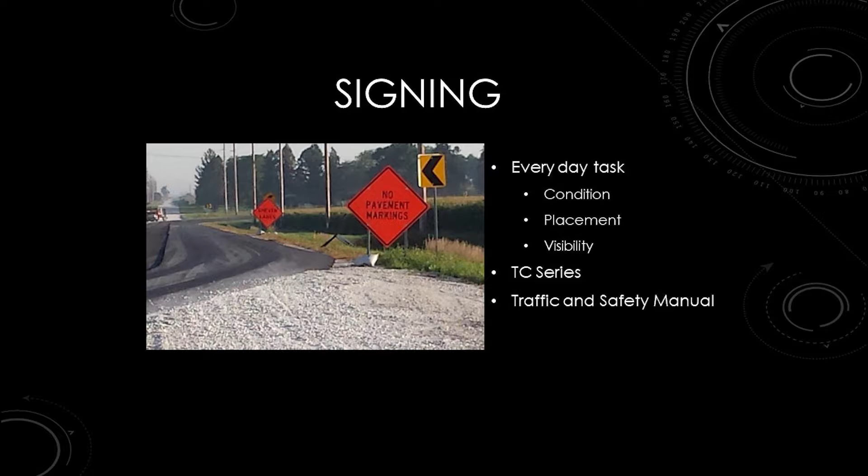This photo was actually taken immediately after the next two photos. I came across this one morning - we just got done cutting cores, I was taking them back to the plant, and there was a young man on his way to work, going too fast, probably on his cell phone. Luckily this was before we were set up. There wasn't anybody else on the road, and he was ultimately okay. He walked away with just cuts and bruises and a banged up truck.

I was very glad that the contractor had signs up and in good condition, because in today's litigious society you never know where there's going to be some liability. The deputy came out, wrote the accident report, noted that signs were in good place, and that was the end of it - we didn't hear any more about it. So it's always good to stay on top of that kind of stuff.

Lighting, that's something I don't think is referenced anywhere in the specs or the construction manual, but I think it's one of those little details that's really important. I was fortunate enough in 2015 to get a new truck, and I think the number one item on my list when I wrote the specs for it was just the biggest light bar wheel it'll make. I've always been impressed with Fort Dodge Asphalt - early in the morning, 5:30, 6 o'clock, they're out there getting equipment fired up, getting stuff fueled up for the day, and you can see their pickups from 4 or 5 miles away. The public traveling to work, maybe coming home from a late work shift, they can't help but notice that, and it just lets them know, hey, there's something going on here, I need to pay attention.

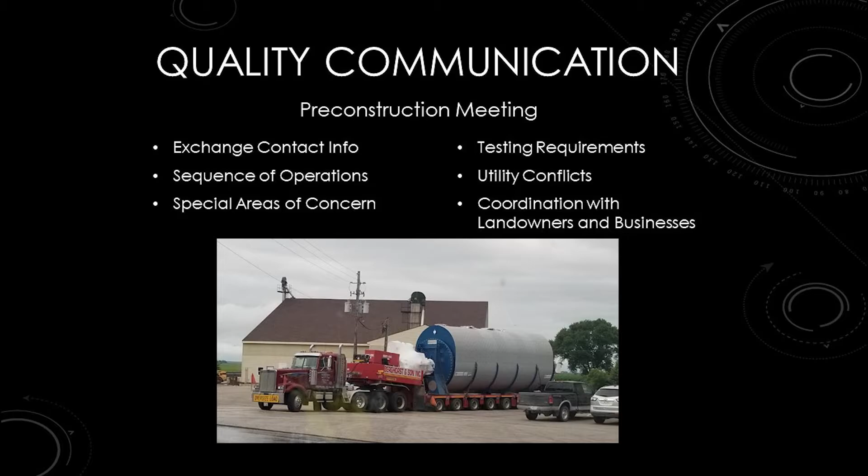You know, communication with the public. This was me having a little fun with my daughter. I took this picture and texted it to her and told her the sign was broken.

We're very fortunate in Webster County. We've got 2 changeable message boards. We utilize them a lot on paving projects, try and get them out there a week ahead of time, just let them know a project's coming. I think it does a lot to help get traffic diverted. Social media, that's something I think we could do a better job at, at least in Webster County. We don't really have that yet, but there's a lot of counties I follow in the DOT that really utilize that and do a good job, and even things like the 511 app. And of course, there's the old standby methods of press releases and mailers. Those things are all important, along with good communication with the contractor during the project.

Email, text messages, Doc Express - these are 3 things that just 12 years ago when I started, I didn't have at my fingertips on the grade, and now I do. Specifically, group text messages work very well for tracking. I always set up a group text with myself, the foreman, the superintendent, and the plant, and at the end of the day we put down what we have for quantities, and everybody sees it, everybody's seeing the same message. That way if I get 3-4 days down the road, and let's say I got busy at the end of the day and forgot to put a number in my books, I can just go back in my text messages. There's the quantities - I know it's already a quantity that everyone's agreed to, and I've got it right there.

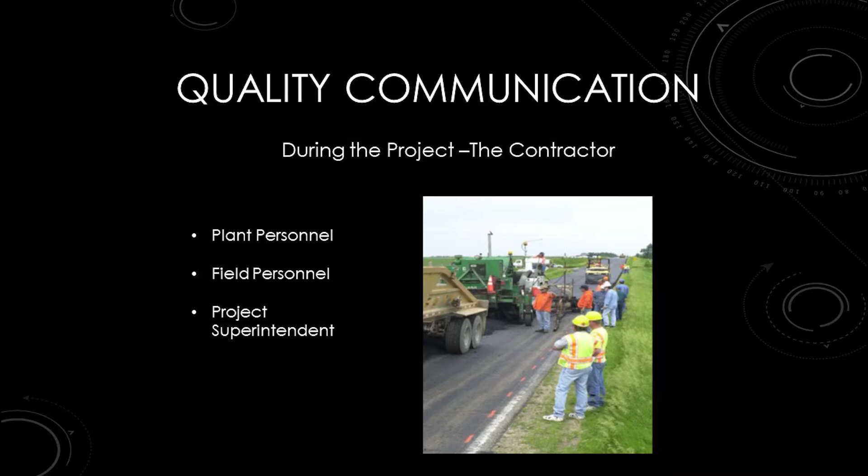Maybe the first thing out of the day, you're going to cut cores. Get with the CPI, ask them when they want to cut them. Normally, most contractors want to cut them first thing out. Get an idea with them - they'll have the core sheet, you'll have the core sheet. Most of the time, I've got my cores all laid out, so it does not take long - half hour, 45 minutes. They can buzz through and cut cores pretty quick if you've got everything done out ahead for them.

You may want to ask them to use a flagger because you're going to be out in the live lane while they're setting up traffic control for the next day and you're going to be cutting cores. Pretty good thing with them. Once the cores are cut, we take possession of them. I'll transport them back to their lab - that's where the monitor will be testing them.

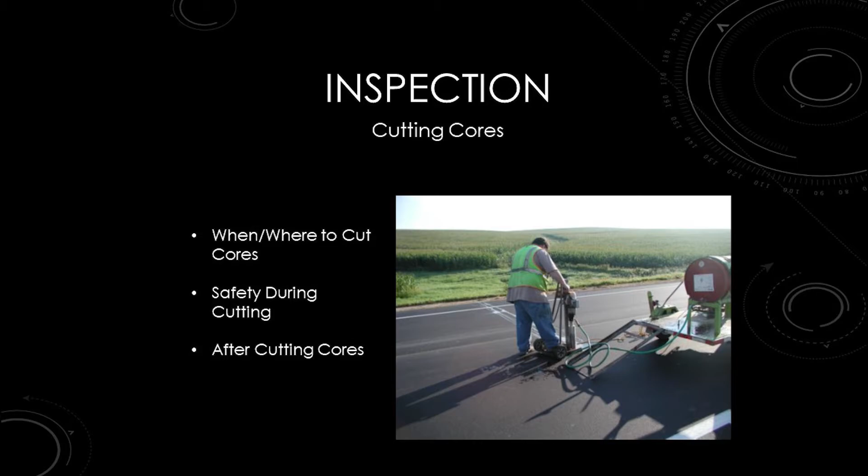The other thing was with traffic control - that's a major concern anymore with litigations. Check the signing, check the spacing, make sure it's out there. If something's not right, talk to your project manager, your road foreman. Road foremen are usually the ones putting that stuff out there. Like I said, if something doesn't look right, chances are it's not right, but just chat with them.

The other thing is the flaggers. You always want to agree with the flaggers with the road foreman. If you run through and count, check with him first thing in the day - he may have something different. Tell him how you're counting your flaggers. A lot of times they think they're getting paid for the flagger in the pilot car - they're not. So just square off right away, it'll be a lot easier on you in the end.

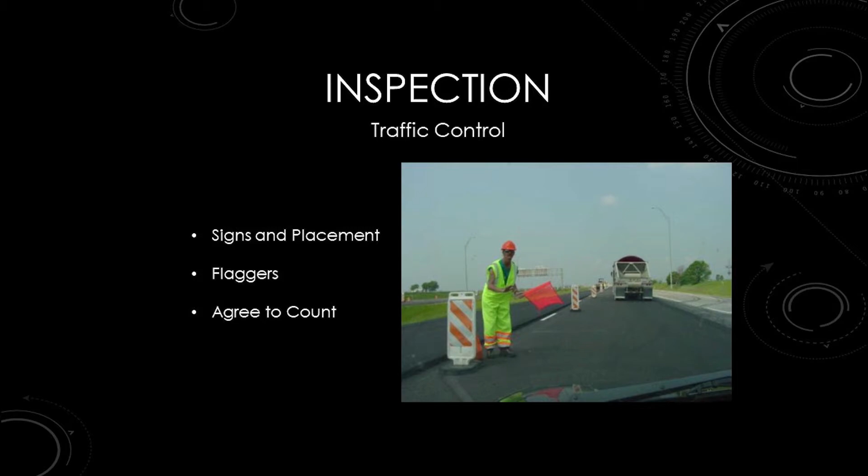Paving operations. You're always going to want to stating location. That's what you're going to deal with most of the day.

If you know where you're starting at, that's what you're going to run your yields with. You're going to go down through there. First thing out, you're going to get a mix temp. You're going to want to make sure that's above your limits.

It's always going to be crowding a little bit because most of your trucks are cold the first round out until they get warmed up. Don't get excited about it. Just let them know, hey, you're crowding the lower end to that temperature limit. Let's get a round in and they'll be warmed up after that.

Normally they are. You're going to be checking your width and your thickness on it. A lot of times when you're checking that, you're getting PWL on your 12-foot lane, but if they're pulling a shoulder with it, it's non-PWL. So just keep an eye on that there when they're coming out.

The roller pattern, that's establish your first time out. When they're going through and establishing a roller pattern, that's what they're setting their density off of. If that breakdown roller's making 3 passes, just keep an eye on him, making sure he's getting his 3 passes. A lot of times you can tell when you're not getting your density, keep an eye on it.

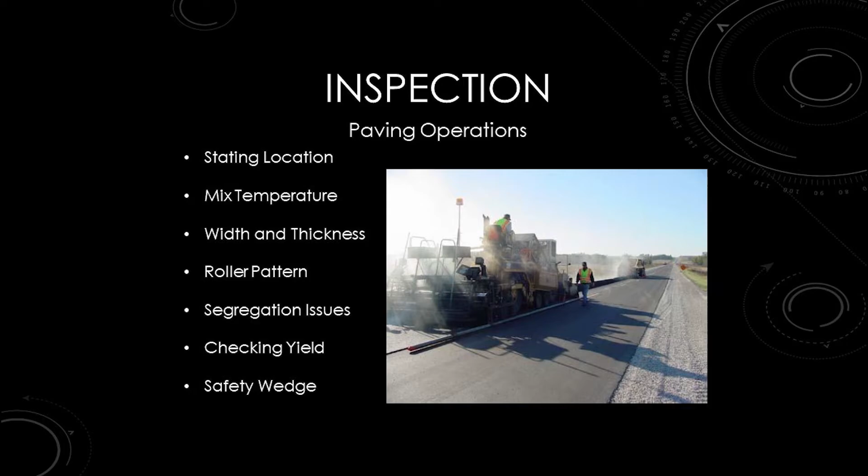On those hot box locations, normally when I turn into the plant monitor what we're running for tons for the day, he's going to make up the hot box locations. He'll be dealing with the CPI when they come out and grab them. They'll be getting all the information on them.

I know Jeff talked about doing it all by barcode. I'm still old school. We still throw in a paper copy too. Some of us don't like change very well. So I always throw the paper copy in there. Boxes still have all the information wrote on it, but you still got your barcode. It's whatever you're comfortable with.

Some of you CPIs, if there's something you don't quite like about it, talk to the inspector. They're more than willing to work with you.

Temperature of the mix on the road, like I said, we pull that every 2 hours. We're looking at that to make sure that mix is coming out hot enough.

Tack coat's another one. I know everybody first thing in the morning likes to spray the tack and lay mix, but we still need to make sure it breaks. We've had some areas where the contractor crowded it and it slid and moved. Normally during the summer months it does not take long for that to break, but when you start to crowd it in the fall and it's cool out, that tack's not going to break as fast. We still have to wait for that tack to break. That's just some of the things we're looking at. We may be sticklers on it, you don't like it, but we don't want that mat sliding on us.

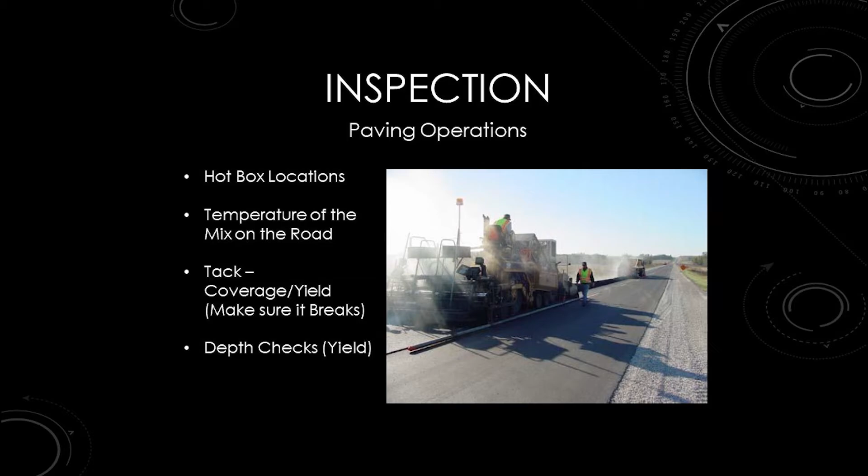At the plant, stay in contact with your CPI and your monitors. Those monitors are there to witness your cold feed samples, your binder samples. They're just witnessing what you're doing. You're loading the tins for them, but they're keeping an eye on the things. Like before I mentioned, I'm turning in the tonnage, what that road foreman said. We're looking at 2,500 ton today. He's the one setting the hot boxes up for them.

He'll be running the cores from the previous day. After I get done cutting them, I'll take them to him. He'll be testing the cores. Normally the CPI will do the trimming of them. If we get too far, he'll trim them off. They'll test them there at their lab.

The other thing is that monitor is going to be walking around your plants. He's mainly checking your bins to make sure you're not overloading them and intermingling. Checking your belts, it's just doing a walkthrough. I always tell the CPIs, your monitor will be out there. Do you have any safety concerns around there that he needs to be aware of? Every plant is different. The people at the plant know where a tight congested area is. Just let them know, hey, stay out of this area here. We don't want you in there. We can still visually see it from some other place.

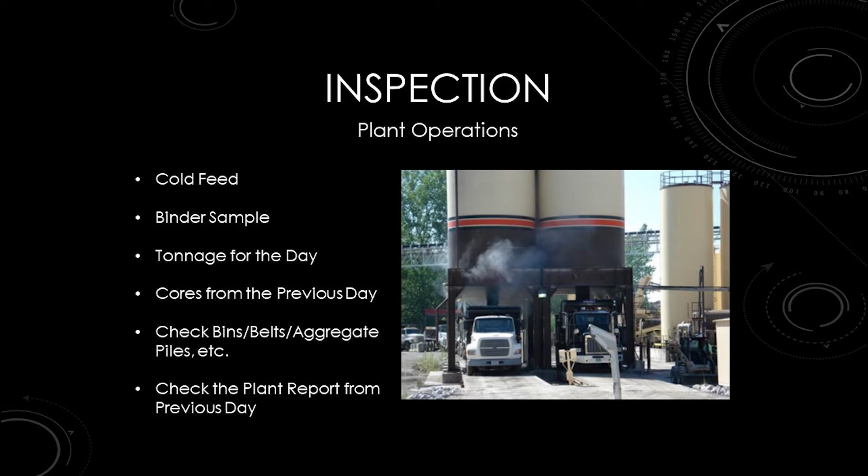Diesel fuel, we don't want it. I've heard every story from every trucker out there. It doesn't hurt a thing. If it doesn't hurt a thing, we do not want it. We will oversee that. If we see trucks that are getting out of line and going behind rock piles, we're going to go back and check and see what they're doing. Truckers do not like it when you pull them out of commission because they're spraying diesel fuel. Well, we're telling you right away, we don't want it.

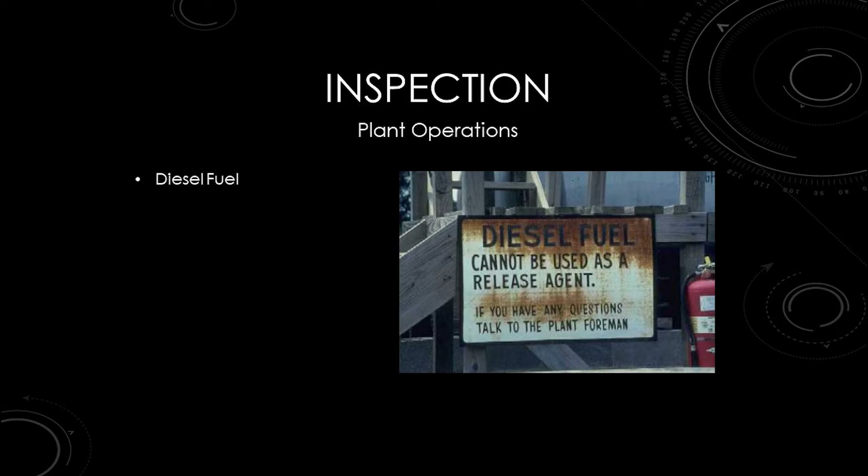Going back to that safety wedge, it's just like I said before, we always allowed you to pull up that rock at the end of the day, but when that mat was still pretty tender, you couldn't get out on it. We always had that 2-inch drop off. If somebody went off of it, they just couldn't retrieve themselves, so we went to the safety wedge. That IM 502, it'll tell you what is acceptable out there. We're looking for that 30 to 35 degree taper. That allows somebody that does veer off the edge of the road, they can still recover.

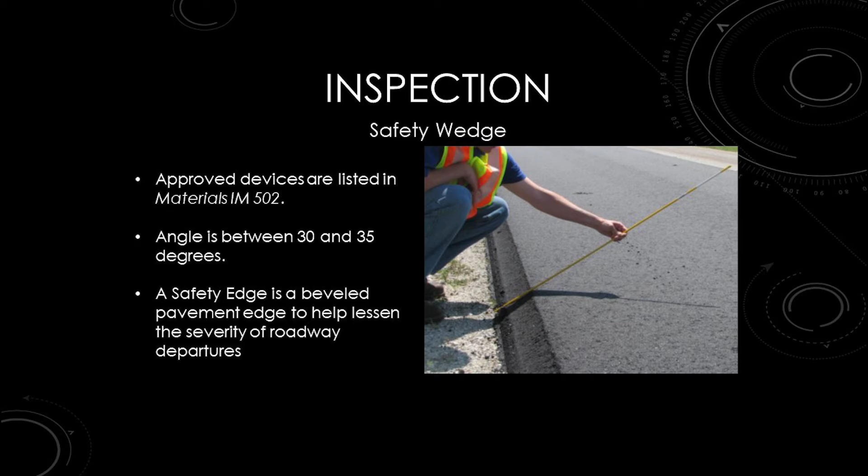At the end of the day, when we get our final ending location, getting the tonnage, getting the waste, that's always got to be verified with the road foreman. He is your first one to verify because he is the one that received everything out on the road. If you have a truck that went down during the day and he didn't see that, let him know, hey, truck so-and-so, we did not receive him, he went down.

He's the one that we want to verify with. Most of the time, I've either got a scratch paper, anything, I'm turning in my tonnage, my waste, my start and end stations. Like Wes said earlier, trust is a big thing. I don't know how many times I've turned one in at the end of the day and I said, hey, do you like it? And he said, I trust you for it. I've earned a lot of respect from these contractors out here. I've got a very good working relationship with them.

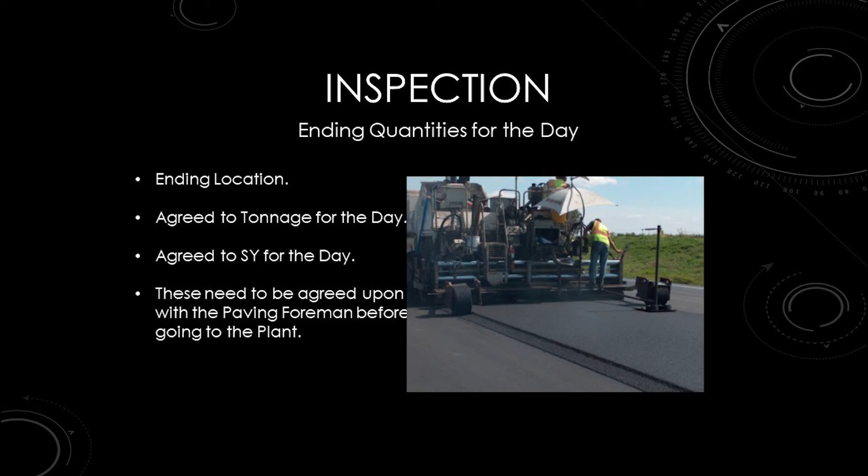Check on your square yards for the day. Most of them shoulders are done in square yards. The thing that's probably going to throw you off the most is if you got an equation out there. If you're going from point A to point B and there's an equation in there, that's where you'll get off in the square yards.

Those random core sheets are something that myself, the inspector out on the road, is going to put together. When I've got a really good idea where that ending station is going to be at, I'll get these core sheets put together and I'll try to get some of these cores, the earlier ones, laid out. So by the time that last load's out there, I can be up there, getting my information, finding out where that last core is going to sit.

Some contractors have come in and said, hey, we never had this in the last district we were in. We just drove down the road and picked a spot, cut a core. But how do you know it's random? The sheet here, that's what it does. When you put in the locations, it randomly spits it out to you, so there's no deviation on, well, this looks like a better spot than that. Just use the form, it works out well. It's user-friendly, and for the matchup, it's going to give you your centerline joint cores too.

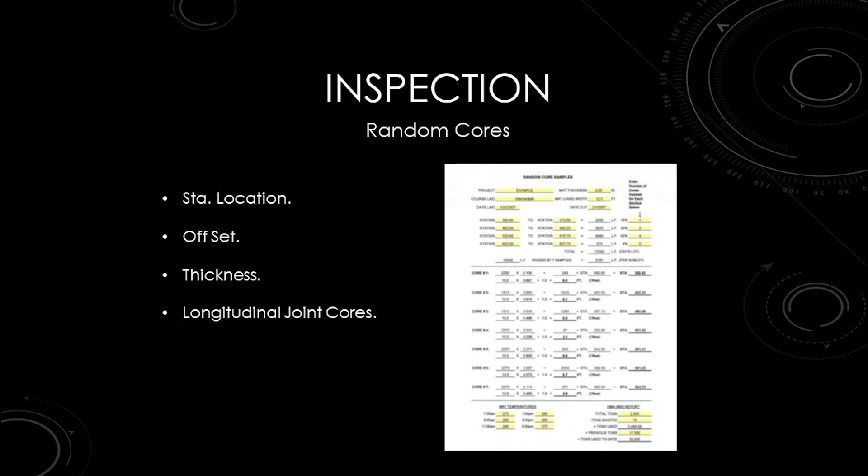Once you got everything verified with your road foreman, kick that stuff over to your CPI because he's the one going to be doing your plant report. Let him know that you verified with your road foreman your tonnage, your waste, your ending location, your start location. You're going to have that hot box location sheet there that gives all the information, the time, the tonnage, the temperature. That's all stuff he needs for his plant report.

Once again, we've already run into issues. Well, we didn't get that in the last job. They need that to give you what you need for a plant report. If you're not giving them the information they want, they're not going to give you the information you want.

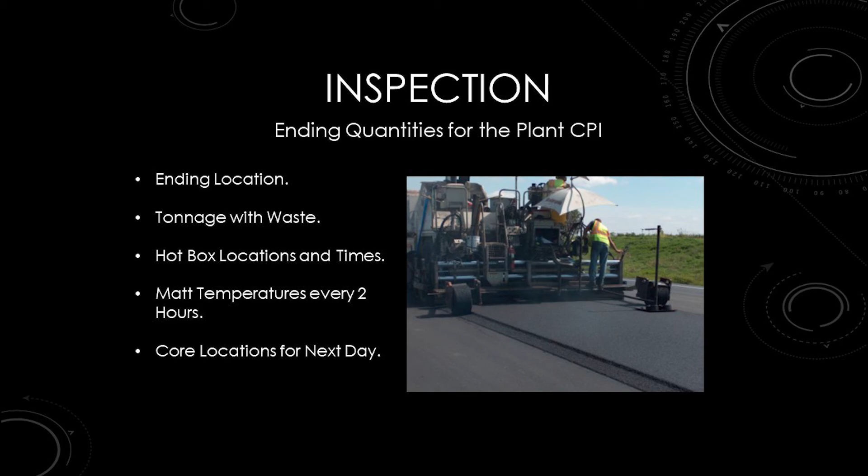Your mix temperature, that's done every 2 hours, so every 2 hours you're going to have a mixed temperature. I admit I have not put them on there from time to time. I forgot about them. CPI will call me, hey, you didn't have the mixed temperature on there. Well, let me check my sheets. I've got everything wrote down on scratch paper.

Communication is the biggest thing out there, and it's probably the most relaxed thing when you're going into other areas. All I'm telling you is communicate with your people, and you'll have a good turnout.